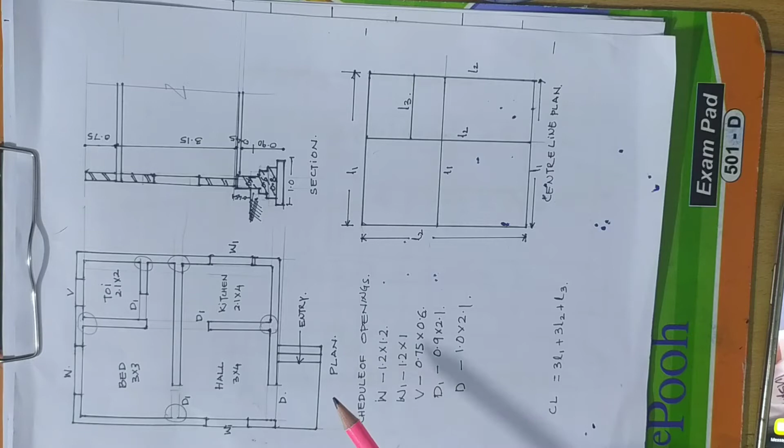Dear students, we'll start with the estimation of one of the residential buildings. Previously we had started with the same problem and we could not complete it, and you also said that you are not able to understand it, so I am doing it again. It's a simple residential building with a flat roof. This time in unit 1 we are concentrating on the roofs.

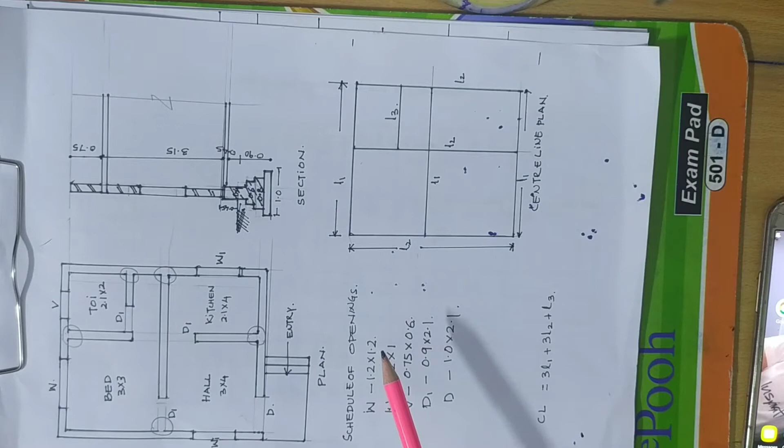According to your syllabus, the concentration is on the estimation of roofs. Firstly, the estimation of RCC flat roof, then the lean-to roof using wooden supports and Mangalore tiles as the roofing material, and thirdly you have AC and GI sheet roofing with MS supports.

You have already taken down this problem, so you know that all are 23 centimeter thick walls here, and I'll just show you the number of junctions here. Number of junctions is the intersection of the walls, so that there is no duplication in the quantity calculation. So we usually take junctions while calculating the quantities for the particular items of work. So 1, 2, 3, 4, 5 junctions are there.

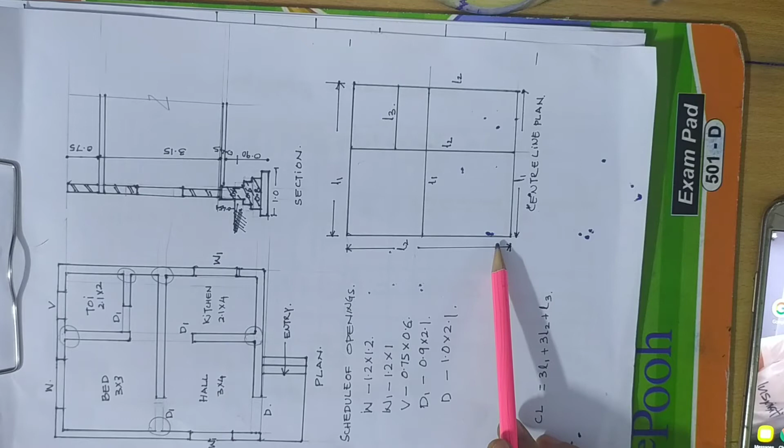Before the calculation of the junctions, we are supposed to calculate the center line length. Center line length is nothing but the total length of the wall, because we need to calculate for various items of work, right from earthwork in excavation, sized stone masonry, and your brickwork. So for all this you need the total length of the walls.

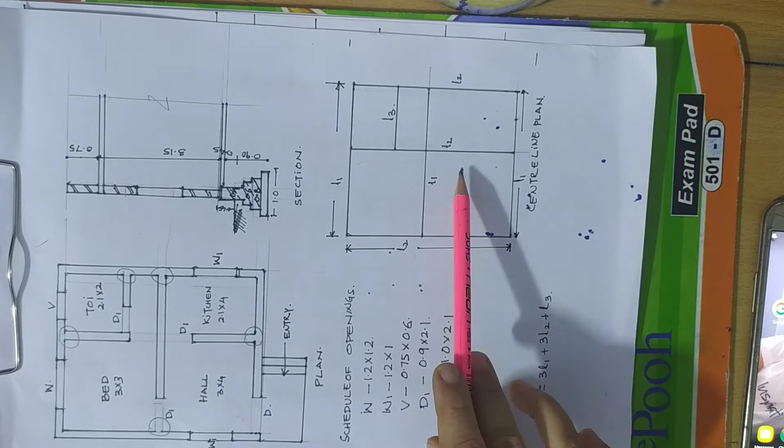So here you can see I have drawn the center line plan, which consists of 3 types of walls. L1 is of the same length, L2 is of the same length, and L3 is single. So we have 3 L1 of the same length, 3 L2 of the same length, and we have L3. So total center line length is equal to 3 L1 plus 3 L2 plus L3. I am just showing you the center line length as it may consume more time.

I have taken down the various dimensions of the walls: 3 meter, 2.1 meter, and half the breadth of the wall here, plus 1 breadth. So we are getting L1 equal to 5.56 meter, L2 equal to 7.46 meter, L3 equal to 2.33 meter. And as I indicated, there are 3 L1, 3 L2 and L3. So 3 into 5.56, plus 3 into 7.46, plus 2.33 is equal to 41.39. I also indicated the number of junctions, which are 5 in number.

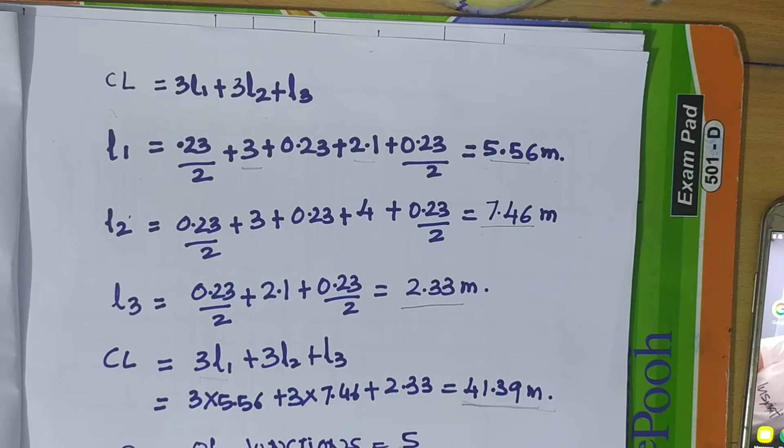Next we will start with the quantity calculation of various items of work. Firstly, earthwork in excavation. As you all know, earthwork in excavation is calculated in terms of volume, that is length into breadth into depth. Its unit is cubic meter. So how should I get the length of the earthwork in excavation? The total center line length is 41.39 minus number of junctions 5 into breadth of the earthwork in excavation, 1 meter, divided by 2. So we'll just use the calculator.

So to calculate the length, 41.39 minus 5 divided by 2 is equal to 38.89. So the length of the earthwork in excavation is 38.89. The breadth is 1 meter and the depth is 0.9 meter. Depth of the excavation, you can see here, is 0.9 meter below the ground.

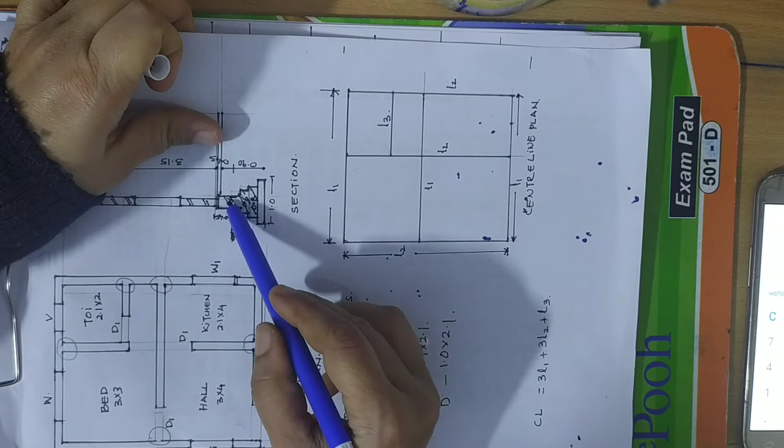We have to start with the first footing. Again, we have to calculate for the length. So 40. You have to see here the sketch. The sized stone masonry consists of first footing, second footing, third footing. Third footing starts below the ground. It continues up till the plinth. You have to calculate the SSM in the first footing separately, SSM in the second footing separately, and SSM in the third footing separately.

So first footing, I am calculating the length: 41.39 minus number of junctions into breadth of the item of work. The first footing is 0.8 meter in width, 0.8 divided by 2. So how much will be this length? 41.39 minus 5 into 0.8 divided by 2. That is equal to 39.39. So the length is 39.39, breadth is 0.8, depth is 0.2 meter. You can refer the sketch for it.

So 39.39 into 0.8 into 0.2 is equal to 6.30. The quantity of SSM in first footing is 6.30 cubic meter. Then I will go to the second footing. So again you have to calculate the length of the second footing. 41.39 minus 5 into, only breadth of the wall differs like this.

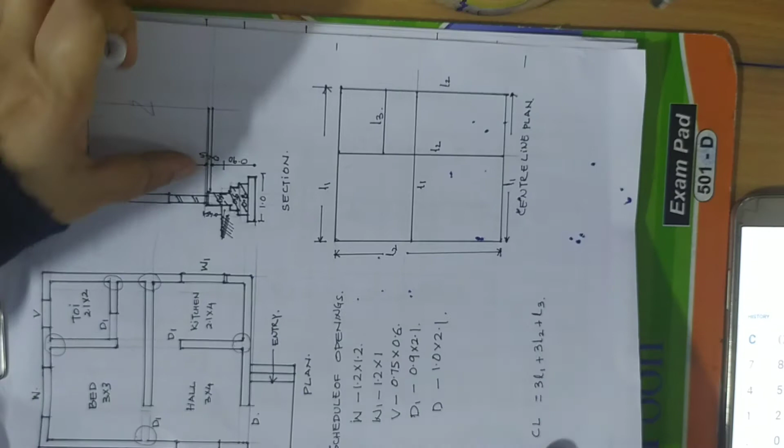So breadth of the wall is 0.4. Depth is, you have to see in the sketch, it is 45 centimeter above the ground up till the plinth, 35 centimeter below the ground. So its depth is 80 centimeter. That is equal to 0.8. So 40.39 into 0.4 into 0.8 is equal to 12.92.

So we'll just calculate the total SSM here. So third footing 12.92 plus 4.78 plus 6.30. So it is 24 cubic meter. Size stone masonry is 24 cubic meter. Okay. So this is about your size stone masonry.

Next we will start with brickwork in superstructure. So again, to calculate the brickwork in superstructure, the method is same. You have to take the center line length, that is 41.39 minus 5 into breadth of the wall, 0.23, divided by 2. So how much it will be? So it is 41.39 minus 5 into 0.23 divided by 2 is 40.815.

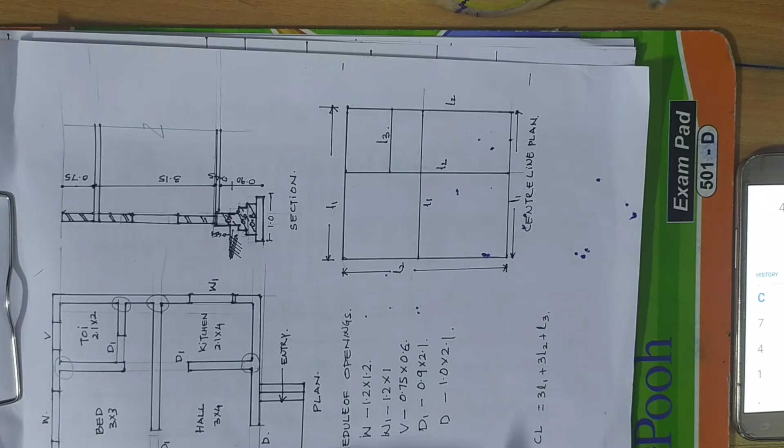So length of the wall is 40.815. Breadth of the wall, you know it. Breadth of the wall is 0.23. Depth of the wall is, you see the sketch, the height of the wall from the floor level to the slab. So including the slab it is 3.15. So I will deduct the slab thickness, that is it will be 3 meter.

Okay. So we will just calculate 40.815 into 0.23 into 3. That is equal to 28.16 cubic meter. Okay. So this is the brickwork in the superstructure in the walls. So next in the brickwork, you know that you are supposed to calculate the deductions. You have to deduct the openings. You have to deduct the lintels. So we'll just take down the deductions.

We have main door 1. The dimension of D is 1 by 2.1. 1. Again the breadth is same, 0.23. Height is 2.1. How much it will be? So 1 into 0.23 into 2.1, that is equal to 0.483. Again it is in cubic meter.

Same way D1, which is 3 in number. The dimension of D1 is 0.9 meter. Breadth of the wall is 0.23. Height is 2.1. So how much it will be? 3 into 0.9 into 0.23 into 2.1, 1.30. Again cubic meter. Next we'll move on to windows. W, 2 in number. The dimension of W is 1.2 by 1.2. 1.2, 0.23, 1.2. So calculate for it.

1.2 into 0.23 into 1.2 is equal to 0.33, into 2, that is equal to 0.66. Same way take W1, 1 in number, kitchen window. Dimension is 1.2 by 1: 1.2, 0.23, 1 meter. So we'll calculate for it. 1.2 into 0.23 into 1 is equal to 0.276.

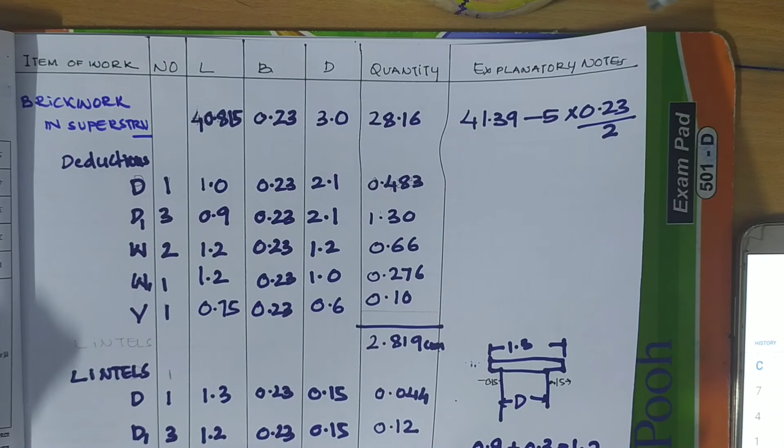So we have to calculate for the other lintels. We have calculated for D, D1. We have to move with the lintel over W, lintel over W1, lintel over V. Okay. So W dimension, you know that, 1.2. W is 2 in number. So 1.2 will become 1.5 because 1.2 plus 0.3. Breadth is 0.23, depth is 0.15. So it is 2 into 1.5 into 0.23 into 0.15, that is equal to 0.10. 0.10 is the quantity of lintel over W.

Then W1 is 1 in number. Its dimension is 1.2. Again it will become 1.5. Okay. So breadth is 0.23. Depth is 0.15. So 1.5 into 0.23 into 0.15, same quantity, but only 1 in number, that is 0.05.

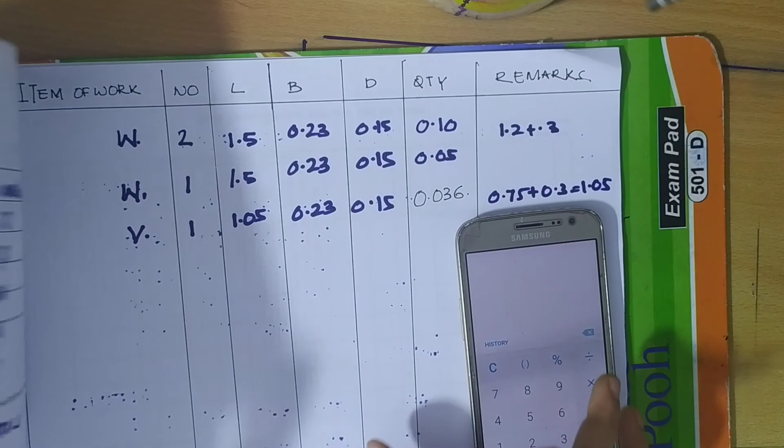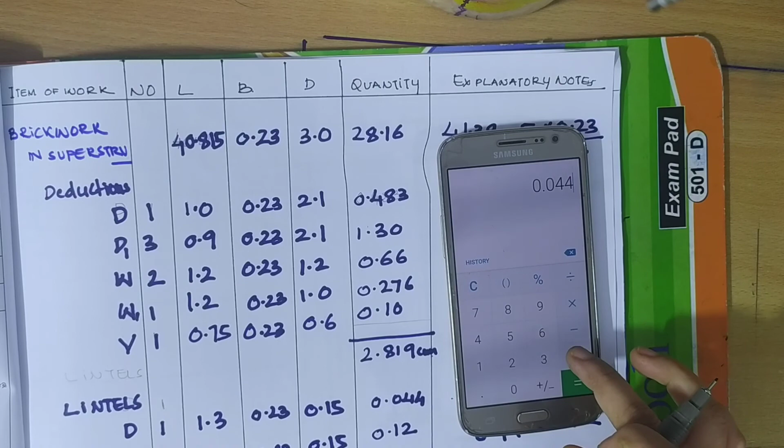So we have to add up the deductions for the lintel. We have 0.044 plus 0.12 plus 0.10 plus 0.05 plus 0.036 is equal to 0.35.

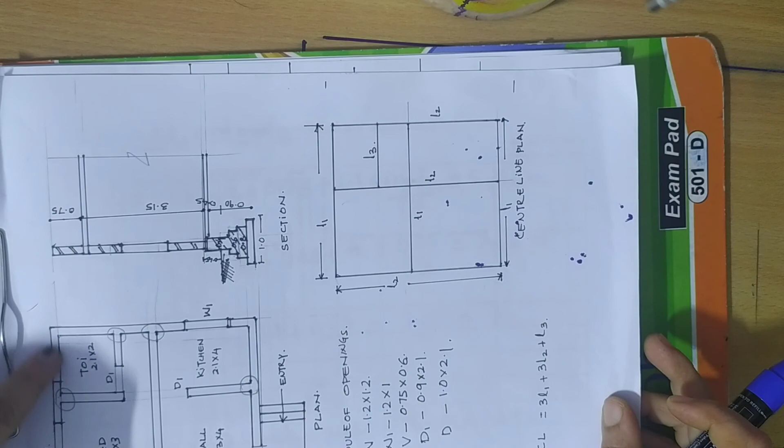So next item of work, the last item of work in this problem, is RC slab. You know that RCC has two components. One is concrete, the other one is reinforcement or the steel. To calculate the quantity of concrete, you have to take the area of the slab. You have the outline of the residence like this, we are putting the slab like this. So we have to consider the area of the roof. I have drawn here the outline of the slab.

So it is of the dimension 5.56 plus 0.23. 5.56 plus 0.23 is equal to 5.79. This is 5.79 into, you have 7.46 plus 0.23 is equal to 7.69. So 7.69 into 5.79 is equal to 44.52. The area of the slab is 44.52. So what we are doing is we are finding out the area of the slab. Then what we